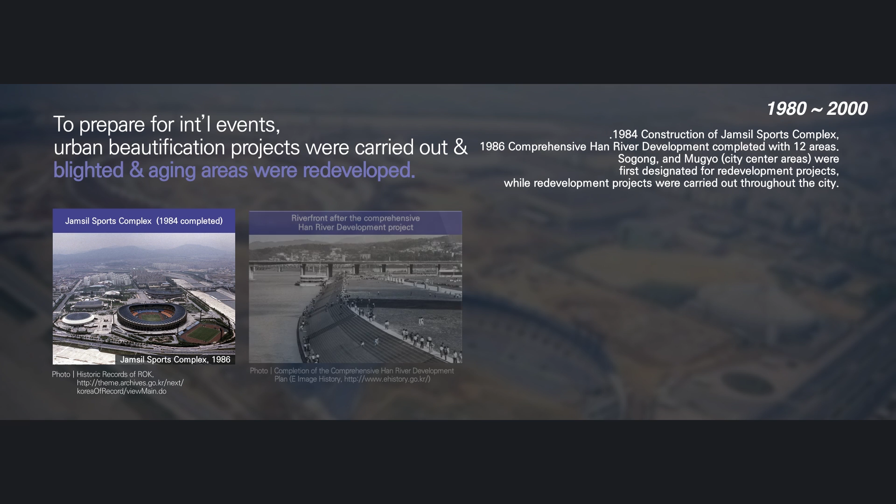With the 1988 Olympics, the city's first global event, as a momentum, the city began to carry out redevelopments in the city's major areas, such as the Han River, and also in hill areas where there were substandard housing.

In the early 2000s, to systematically redevelop the aging town areas, the city executed large-scale renewal projects, such as the new towns.

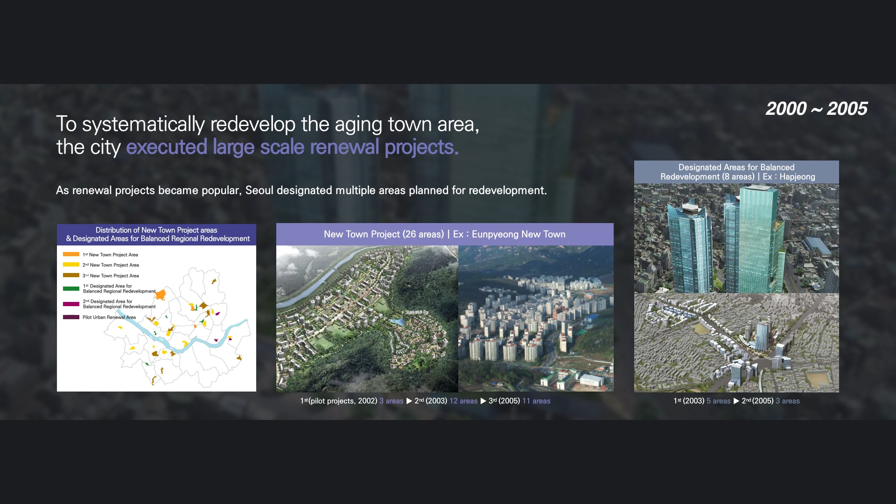Simultaneously, with changing urban planning paradigms, efforts were made to restore the city's identity and create pedestrian-oriented places for citizens.

Recently, the city has been concentrating its efforts on human and historic, cultural, environmental, landscape-centric urban regeneration, tailored to each area's distinctive characteristics. As a result of its citizen participatory urban regeneration endeavors, Seoul has been awarded the Lee Kuan Yew World City Prize, which is considered the Nobel Prize of Urban Administration.

However, Seoul is currently faced with urban problems inflicted by the side effects of its very remarkable economic growth and development. Due to disorderly development, communities were destroyed and unbalanced regional development occurred. Its beautiful and valuable historical and cultural heritages, environment, and landscape have been harmed. Serious levels of pollution were reached, while abnormal climate is worsening.

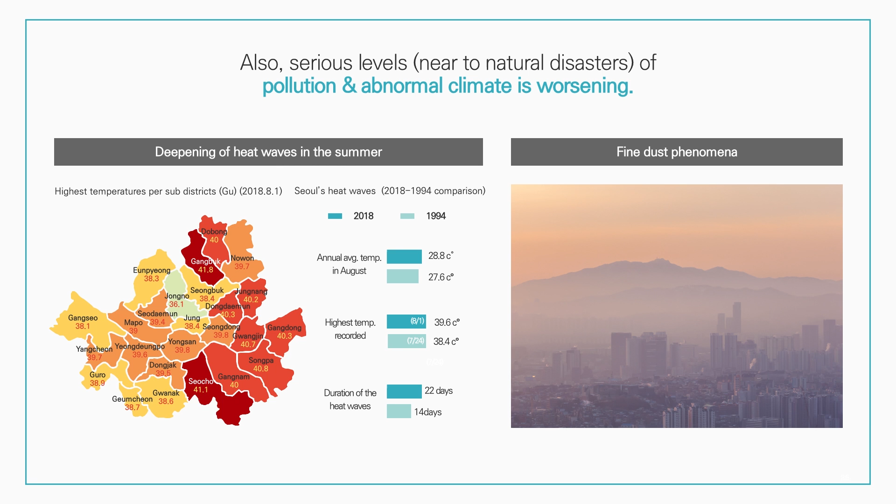Also, the city has entered an era of low growth with the aging population and deepening youth unemployment. Therefore, the city of Seoul is seeking to apply an urban planning system, policies, and projects to solve such various urban problems.

From now on, we will go over the details on how Seoul is managing its urban spaces with its urban planning system and detailed plans.

Also, the city planned the 2030 Seoul Plan in detail and established the 2030 Community Plan, which provides directions and guidelines for relevant plans and sub-plans for development. Based on these, major area development plans and urban management plans interact with individual spatial and development plans, helping the city manage Seoul's spatial plans and policies in a sophisticated framework.

Next, we will continue to look at these major urban plans in detail.

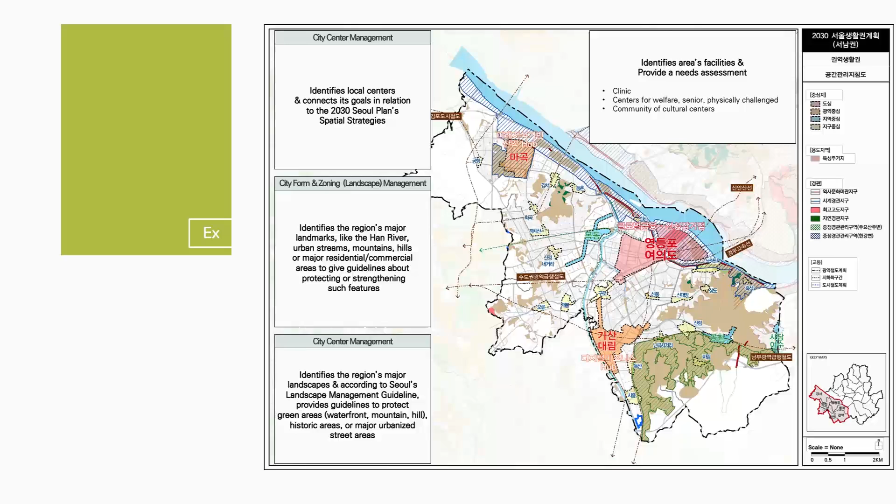Regional Community Plan focuses on raising the competitiveness and self-sufficiency of each region to lead balanced development among regions. The Local Community Plan reflects the residents' opinions, locally pressing issues, and reflects each area's different needs in detail. The Guidelines for Spatial Management provides detailed urban management directions for each community area's development concept or blueprint.

For example, here is the Spatial Management Plan for the Southwestern region, which is visually mapped out spatial plans for the community area's development concept. Here's the Spatial Management Plan for the Doksan community area, which is one of the community areas of the Southwestern region.

Historic City Center Master Plan is a plan to manage in detail the historic city center located within the 4 main gates of Old Seoul that has served as the capital of Korea for the last 600 years. The historic city center has been in the center of Korea's history and is one of the most representative tourist attractions in contemporary times. Thus, the area requires a special plan for its area management.

By reflecting citizens' opinions, the vision of the historic city center was decided as the city center where citizens' lives and history coexist. 5 core issues and spatial management plans to spatially achieve such goals constitute the master plan.

The spatial management directions entail the following. First, to respect the historic city center's distinct natural historic frame. Second, to induce gradual regeneration while considering its various characteristics. And third, to establish a sustainable network connecting the center's major spatial functions.

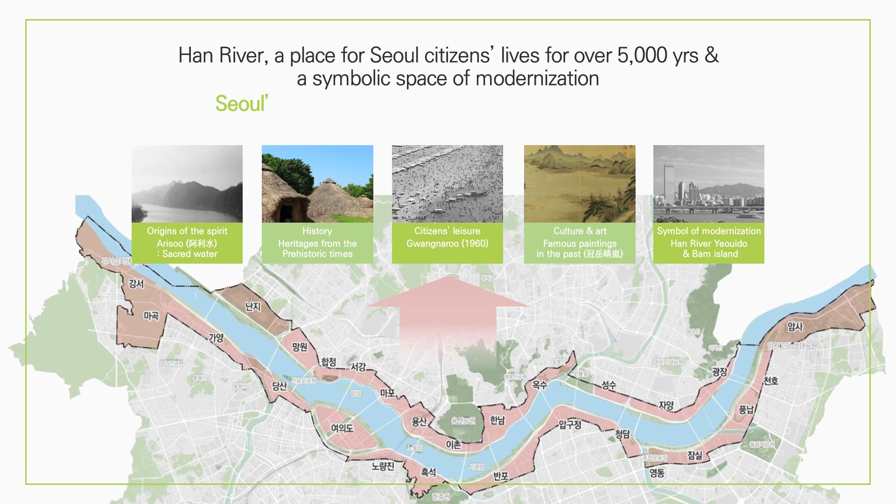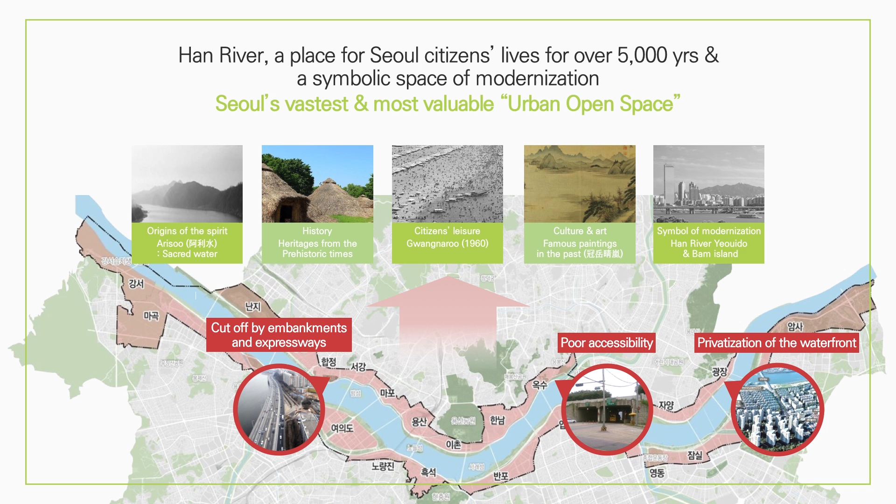Lastly, the Han Riverfront Management Master Plan is the first master plan for the Han River based on the 2030 Seoul Plan. The Han River is a symbolic space of modernization, as the term Miracle of the Han River stands for Korea's economic growth. It is Seoul's vastest and most valuable urban open space. However, it is cut off by expressways and its surroundings are mostly privatized, making it difficult for Seoul citizens to access and enjoy. To create a citizen-centered Han River that serves the public interest even after a century, Seoul, with its citizens, established 12 management principles for the river and riverfront across 4 sectors: nature, land use, accessibility, and urban landscape.

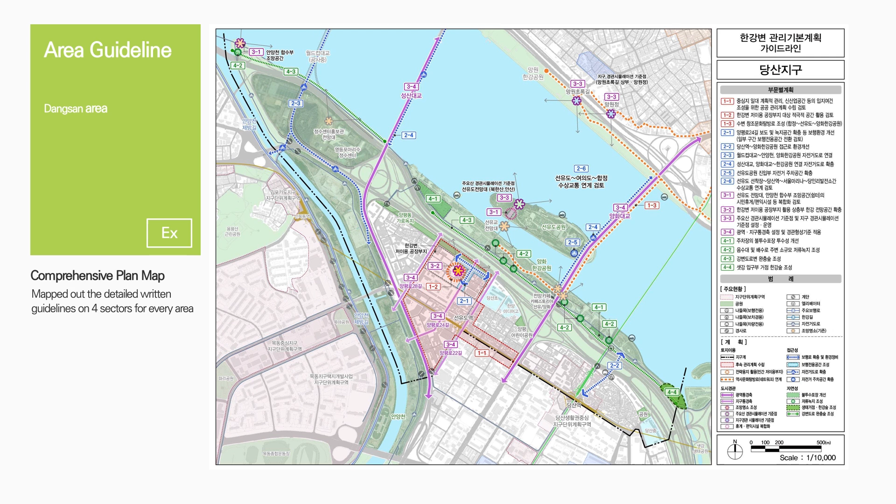The plan divided the entire river and riverfront area into 7 regions and 27 areas, providing each area with tailored management principles so the plan can offer concrete guidelines when other urban plans or developments are carried out. As for the Dangsan Area Plan within the Han Riverfront Management Plan, this comprehensive area map includes detailed implementation plans reflecting the area's characteristics, such as being a place where two streams converge and where there are many industrial areas.

Next, we will introduce some of the major projects now being carried out in Seoul. Within the framework of a strong urban planning system, Seoul is carrying out various urban planning projects to retrieve Seoul's identity and strengthen its global urban competitiveness. It is focusing on growing urban centers for the city's competitiveness and balanced regional development, utilizing historic and natural resources to pursue historic cultural regeneration, regenerating residential areas, rejuvenating communities and the local economy based on resident participation, and preparing for Seoul's future growth engine by supporting the youth. We will further explain some of these major projects.

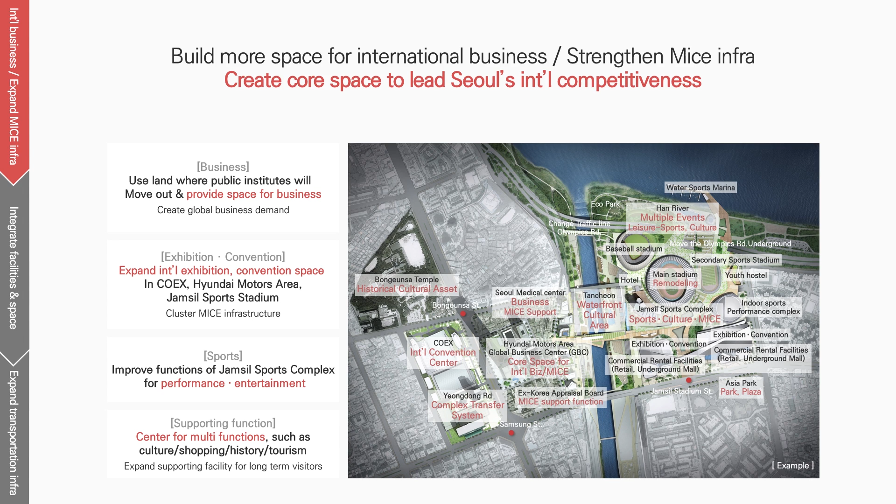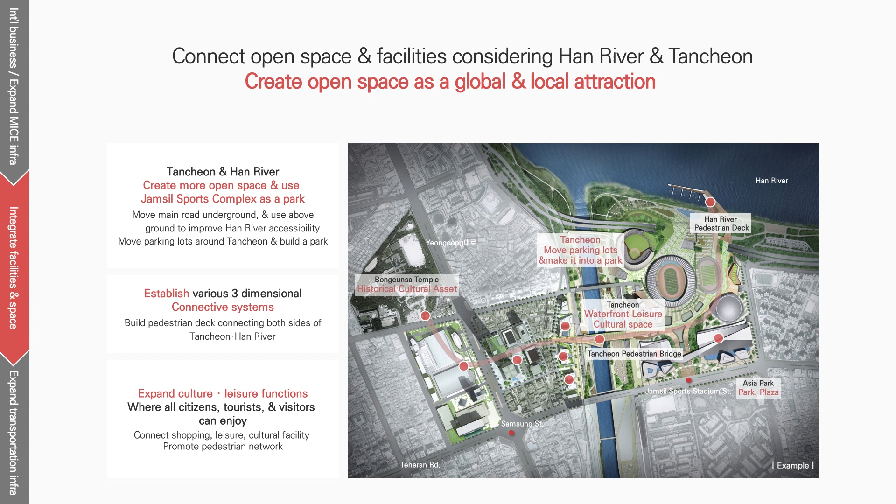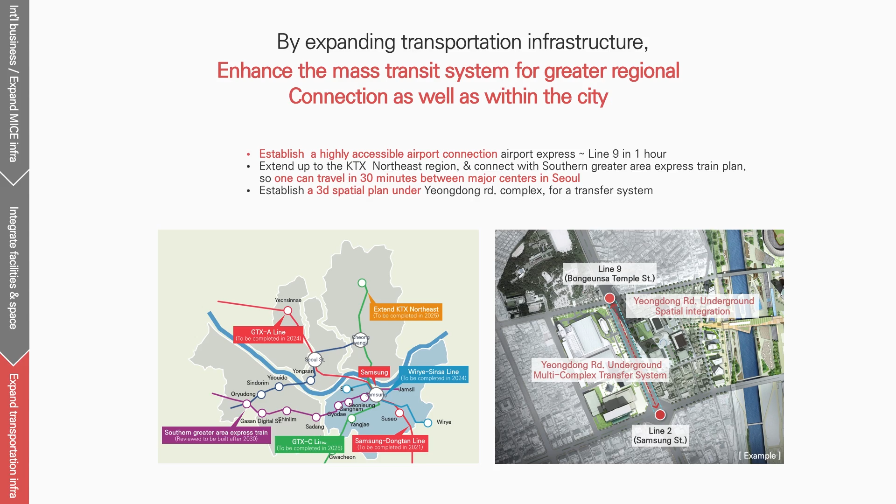The first direction is to build more space for international business and strengthen MICE infrastructure to create core spaces leading Seoul's international competitiveness. The second is to integrate open space and facilities with the Han River and Tancheon Stream at the center, creating grand open space and developing it into a global and local attraction. The last direction is to expand transportation infrastructure to upgrade mass transit for greater regional connection as well as within the city. Through this, the Yeongdong area will become a place that leads Seoul's urban competitiveness.

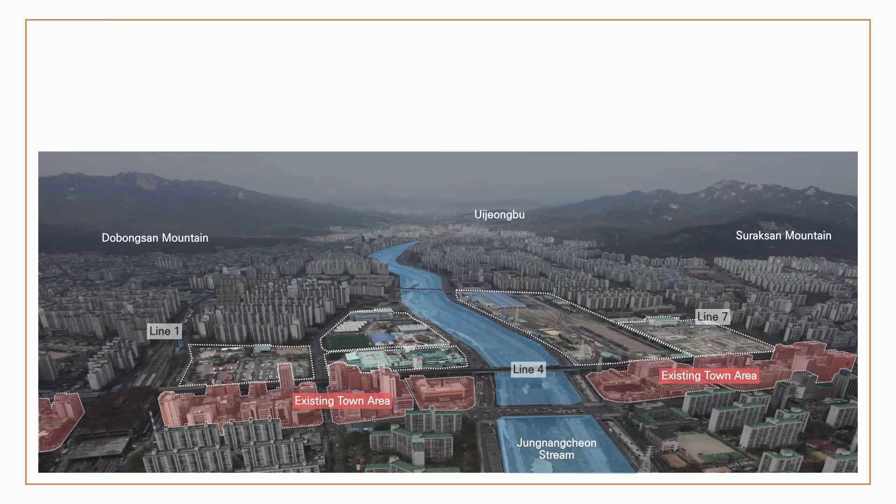Next is the plan to create the Changdong-Sanggye New Economic Center in Seoul's northeastern area. In the northeast of Seoul, in a strategic location connecting the city center to the outskirts, about 0.38 square kilometers of underused areas are concentrated around Changdong and Nowon Station. With expected urban regeneration using these sites, the Changdong-Sanggye area is located in the middle of Seoul's northeastern area with a population of 3.2 million. It has been promoted into a regional center status in the 2030 Seoul Plan, with great growth potential to become the center for jobs and culture in the region.

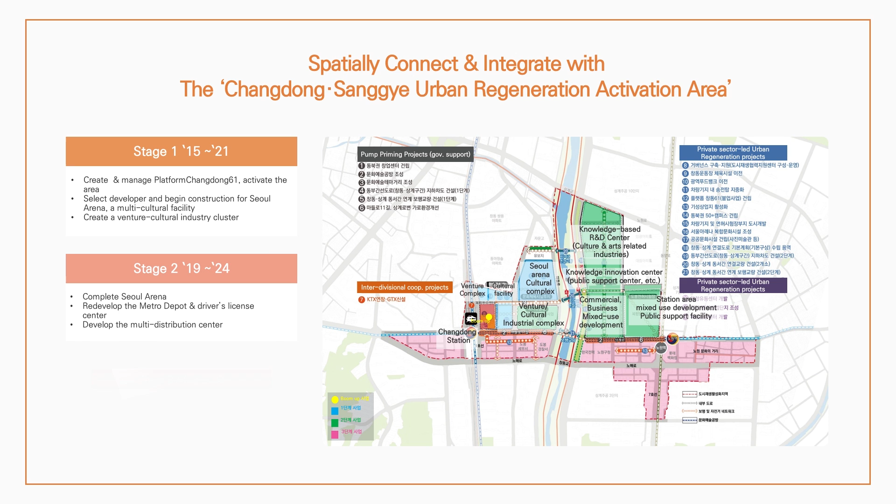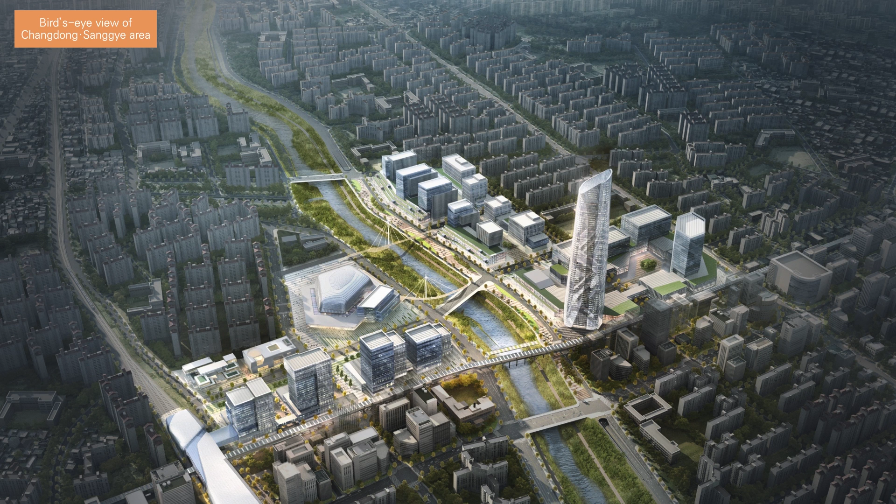With the vision of growing the Changdong-Sanggye region into the center for jobs and culture for the 3.2 million people in the northeastern region, Seoul established visions for the area to become an advanced space for culture and the arts, and the center for smart technology-based innovation growth businesses. To consistently follow Seoul's urban regeneration vision and goal, 12 projects and 24 sub-projects were devised and selected. With the initiatives of the Pump Priming project and other lead projects, such as the Metro Depot development and multi-distribution center construction, Seoul aims to spatially connect and integrate the urban regeneration activation area. Through this, we expect the Changdong-Sanggye area to be reborn as the new economic center of the capital's northeastern region, with a multitude of jobs and cultural resources.

Now, this is a project located in the southwestern area: the Magok Industrial Complex Urban Development Project. Magok area has been designated as an urban development district based on the necessity to create a long-term and comprehensive plan, because of the area's significance as Seoul's very last large-scale undeveloped area. Its vision and goal is to become a knowledge industry-based green city leading the future of Northeast Asia. The goal of the Magok area is to create a self-sufficient knowledge industry cluster where cutting-edge research, business, and leisure are possible.

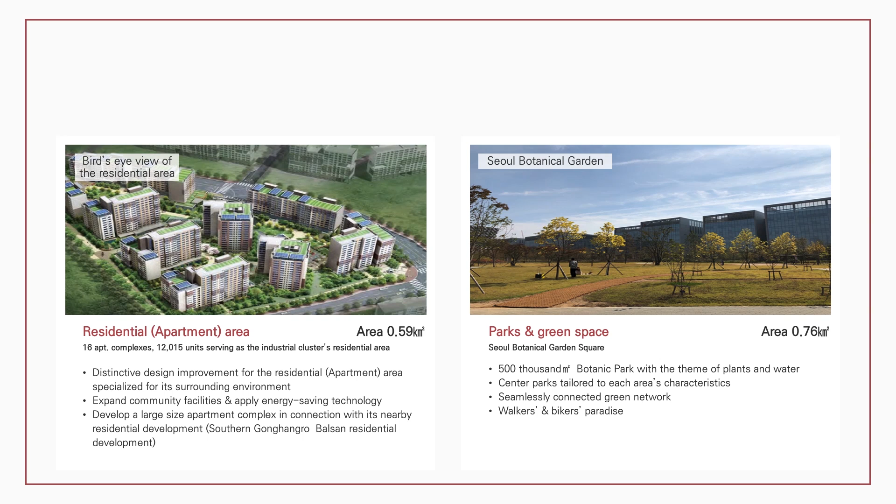To activate Magok area, a residential area behind the industrial complex is designed, which is going to be a walkable and bikeable area with abundant green open space.

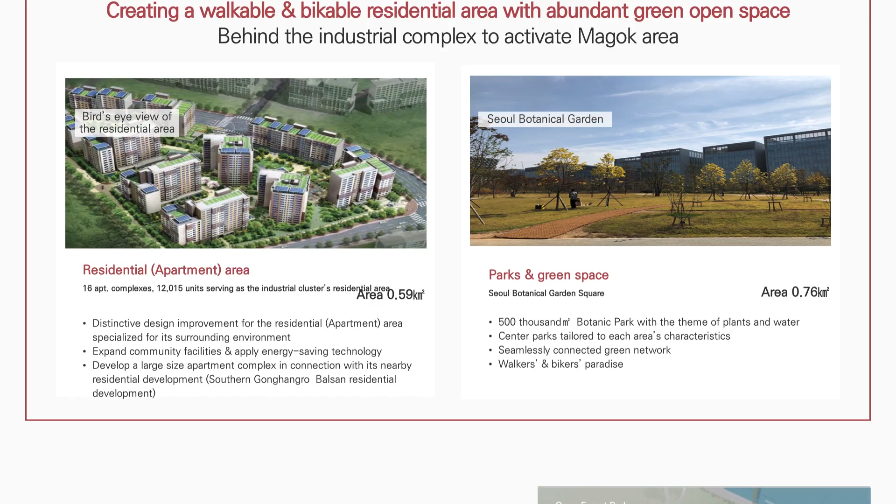Recently, Seoul Botanical Garden opened, with the theme of plants and water. This open space provides a unique experience in the daily lives of Seoul citizens who are urban dwellers.

Magok area is being recreated as a self-sufficient city with a global R&D cluster equipped with residential and commercial functions, along with a park.

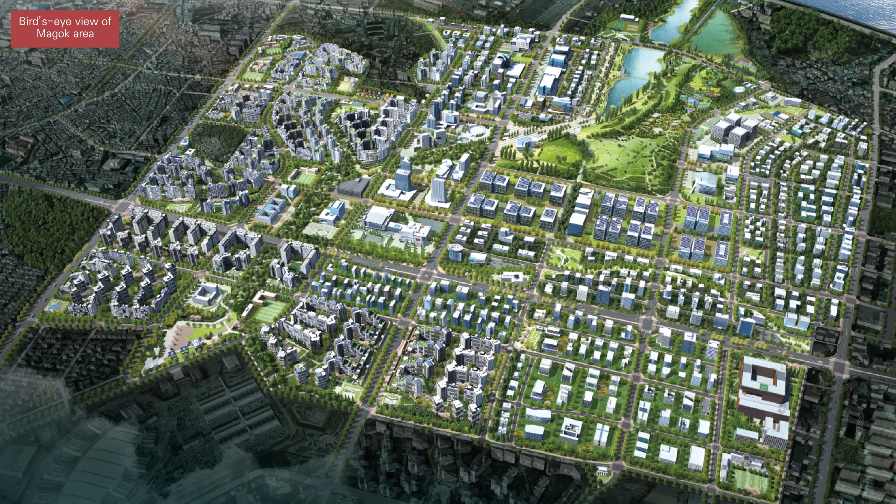Next is the Campus Town project, which covers 49 university areas in Seoul. As youth unemployment and housing problems for the youth are deepening, such effects are also affecting universities and their nearby areas. We aim to solve the problems of youth, universities, and their neighboring areas originating from youth unemployment through urban regeneration.

By having universities cooperate with local economies and with government support, our purpose is to reinvigorate campus towns with a focus on creating jobs. The Campus Town project considers the locational characteristics of each university and executes spatial plans to foster exchanges and communications among creative agents.

Based on university resources, local demand, and cooperation between Seoul Metropolitan Government and the central government's public projects, we wish to diversify and systemize Campus Town programs depending on university and local characteristics. We wish to strengthen the university network while maximizing and linking the strengths of university characteristics, creating a sustainable campus town cluster and a creative ecosystem.

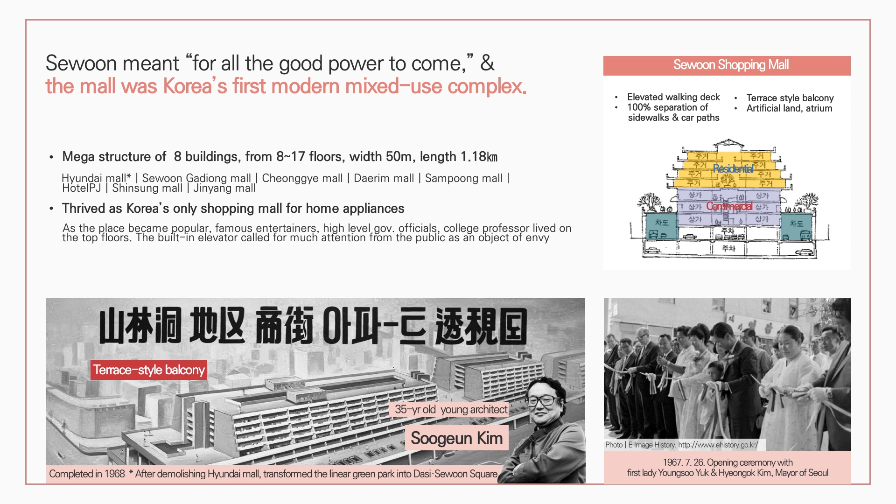However, as Yongsan and Gangnam grew into city centers for industries, Sewoon's industrial function debilitated over time, leading to the area's demise to the point of considering the destruction of the structure. Seoul established a new regeneration plan to activate Sewoon centered on the creative cultural industry.

Its first phase was completed and opened in September 2017, and Phase 2 has begun construction. Firstly, the Phase 1 area, in which the Green Linear Park was designed, was changed into creating Dasi-Sewoon Square, which connects all the way up to Jongmyo area.

The view of Jongmyo will spread out once you go up to the rooftop of Sewoon. The elevated walkway connects north and south as it links Sewoon, Daerim, and Jinyang retail stores, which is part of Phase 2. The project reorganizes the space above and below the deck, then connects to its surrounding areas.

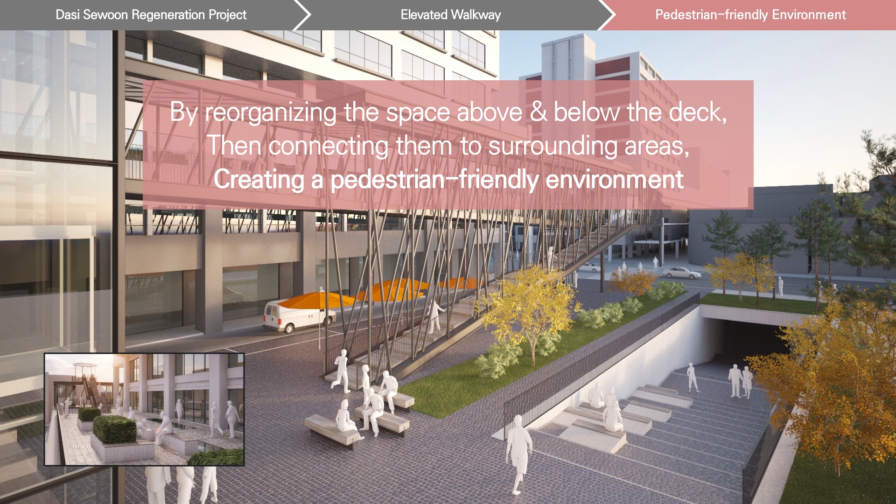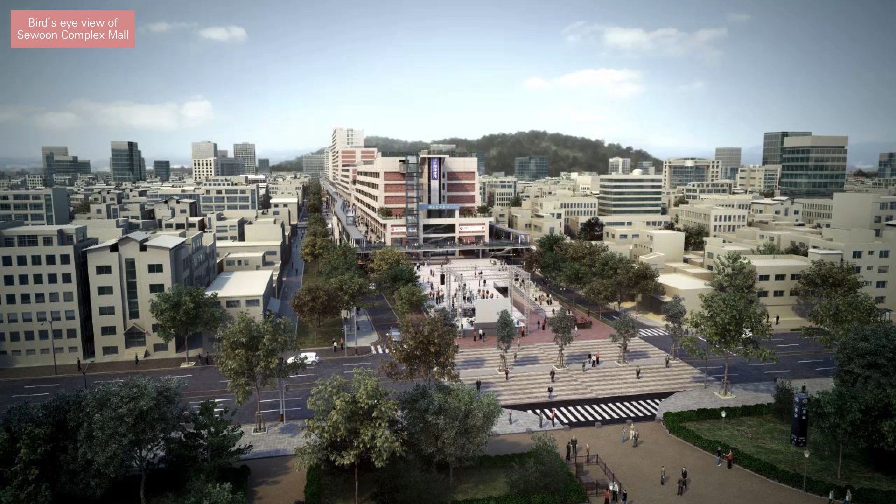This creates a pedestrian-friendly environment. Once the Sewoon regeneration project is complete, there will be an elevated pedestrian network which seamlessly connects Jongmyo to Namsan.

Lastly, this is the Seoullo 7017 project. With 0.39 million daily users transferring to and from all directions, Seoul Station can be called the center for Korea's transportation and the gateway to Seoul.

Since the completion of Seoul Station's overpass in 1970, it has been a symbol of modernity, serving as the major road for sewing factory merchants coming from Namdaemun Market, Cheongpa, and Malli-dong.

Although Seoul Station was the main center of transit, due to its isolation from its dwindling surroundings caused by the layout of the overpass and car-centric design, it was considered merely a passing place for transfers. As a result, the station's vitality has not permeated throughout its surroundings.

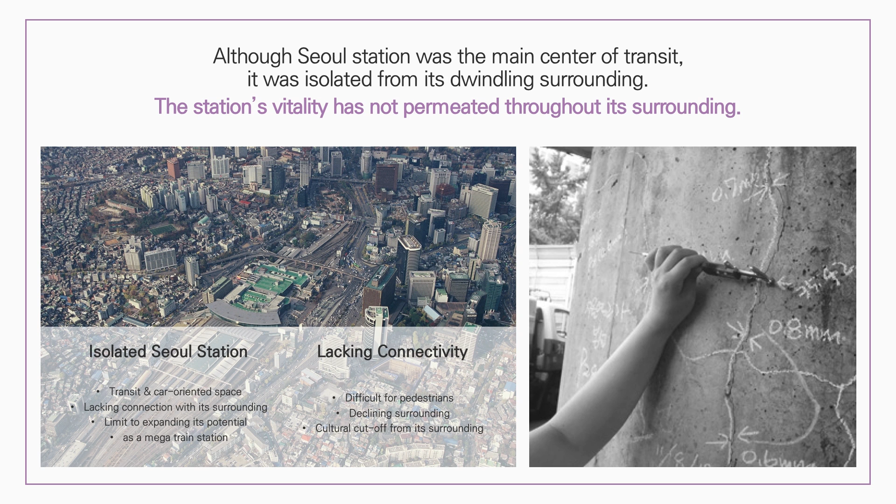Additionally, in 2006, it received a D on a safety inspection, causing the city to discuss its removal. The city of Seoul pushed ahead with the Seoullo 7017 project, which was mainly to reuse the overpass, in order to utilize the Seoul Station overpass as a catalyst for the surrounding area's regeneration and revival.

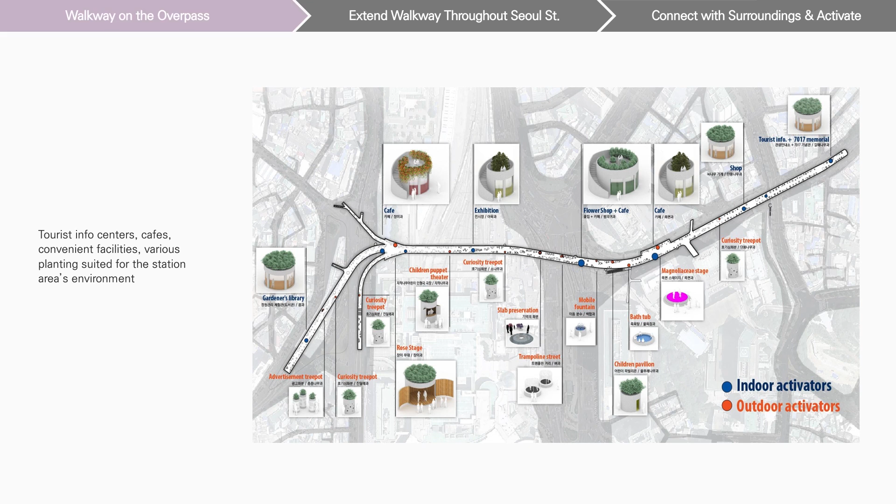The city recreated the overpass into an attractive place equipped with convenient facilities and diverse planting to relax, walk, and experience various activities.

Pedestrian paths were built to connect the once cut-off stations from west to east, which also led pedestrians to walk towards the surrounding areas. Additionally, the project seeks to find more ways for mutual economic growth and cooperation for Namdaemun Market and its surrounding areas, so that the vivacity created by regeneration can spread throughout its surroundings.

Seoul, together with its citizens, is building the future image of the city for the next 100 years. Thank you.